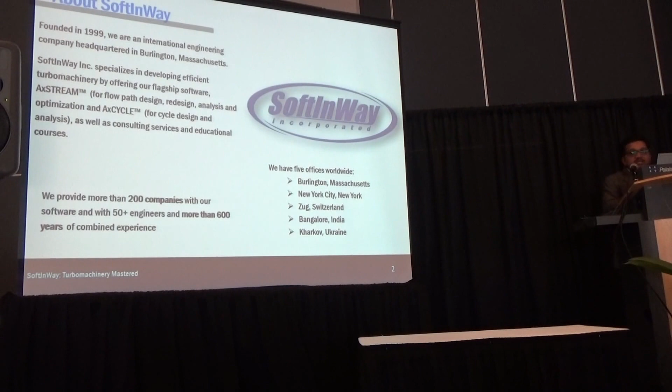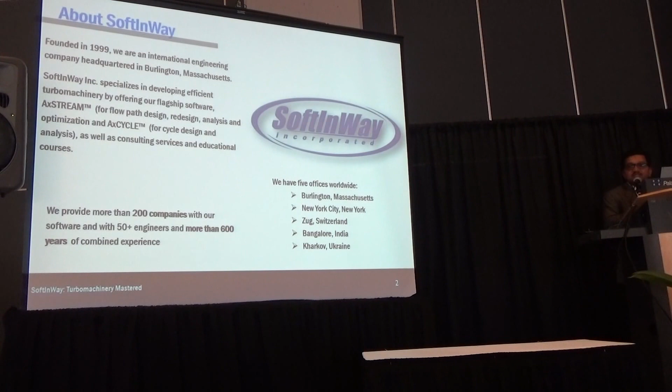Just a brief about Softinway. We are founded in 1999 as a consulting company headquartered in Burlington. We specialized in developing turbomachinery design tools and thermodynamic cycle design tools. We have two products, AxStream and AxCycle. Apart from this, we also do consulting services for design of turbomachinery components. We provide more than 200 companies with our software, with 50 plus engineers and more than 600 years of combined turbomachinery experience. We have grown to 5 offices now, headquartered in Burlington, an office in New York, one office in Bangalore in India, an office in Zug, and in Ukraine.

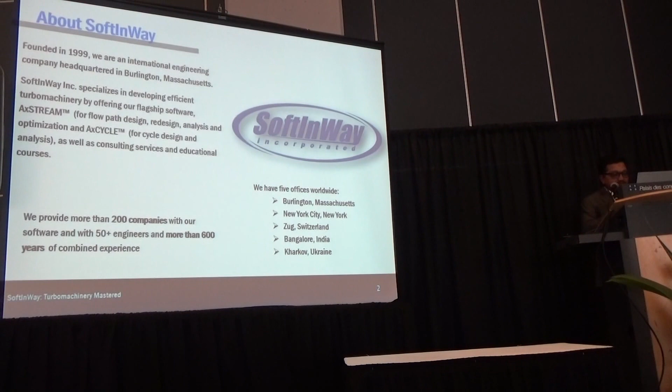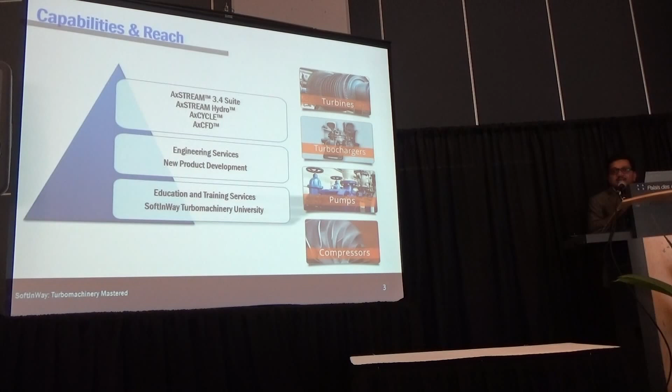We have extensive capabilities and reach. We cover educational services, offering online trainings and classroom-based trainings. We also have our Softinway Turbomachinery University.

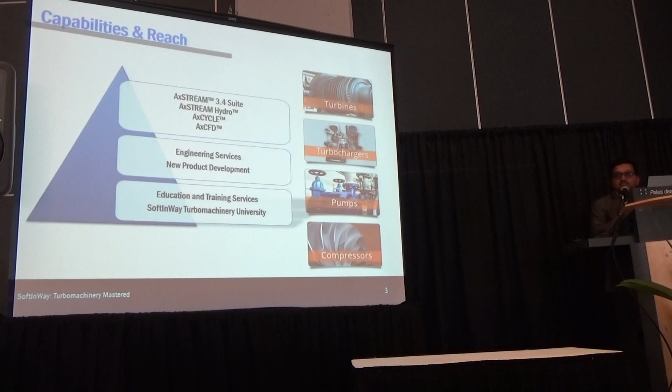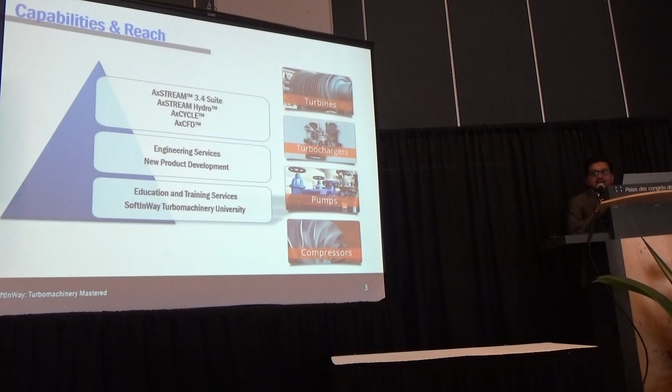Engineering services is our next major part of business. We do everything from full product development to any bits and pieces of the activity that any OEM requires. We have 4 major products: AxStream 3.4, for design of turbomachinery with compressible fluids; AxStream Hydro, for design of pumps and hydraulic machinery; AxCycle, for thermodynamic cycle simulation; and AxCFD, for standalone CFD analysis.

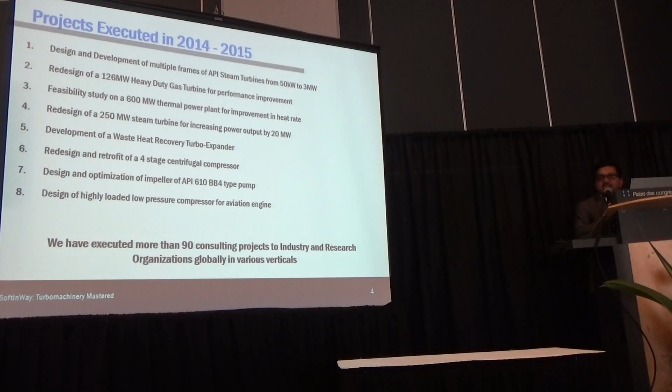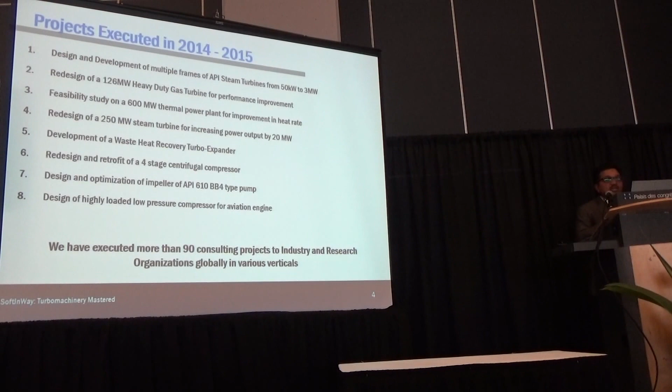These are some of the projects executed in the last year, 2014-2015. We have done design and development of multiple frames of API compliant steam turbines from 50 kilowatt to 3 megawatt, and redesign of a 126 megawatt heavy duty gas turbine for performance improvement.

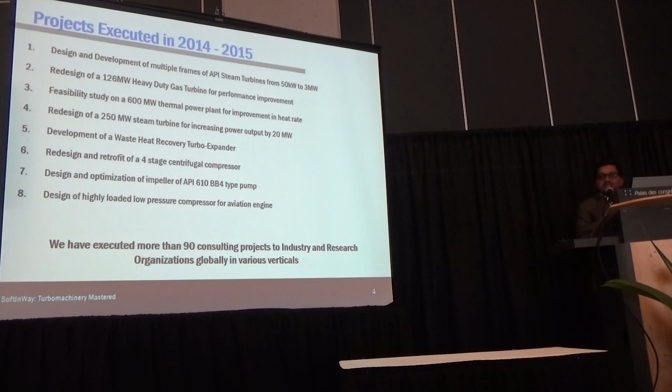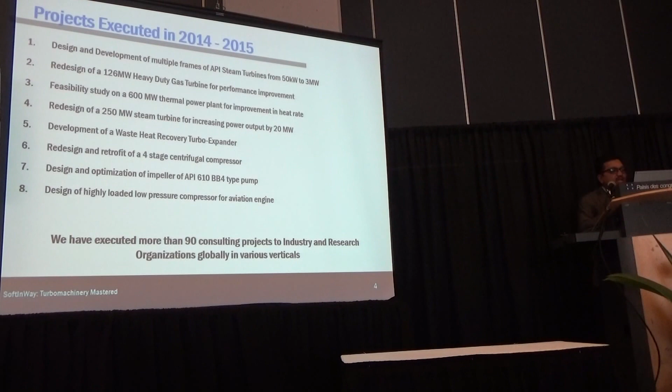This is one of the other projects we did: a feasibility study on a 600 megawatt thermal power plant for improving the heat rate, looking at what possibilities existed for improving heat rates. Also, redesign of a 250 megawatt steam turbine for increasing the power by about 20 megawatt, around 10% increase in capacity, and development of a waste heat recovery turbo expander for an automotive application.

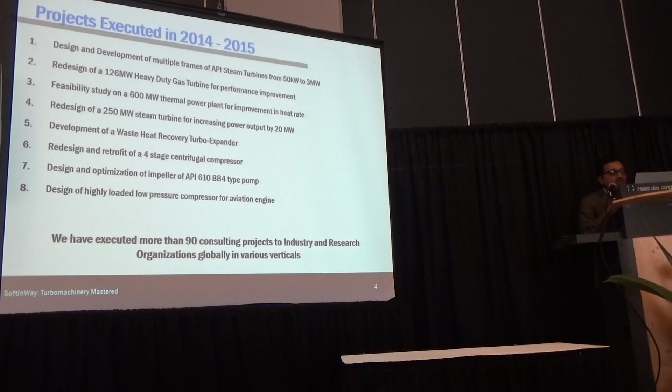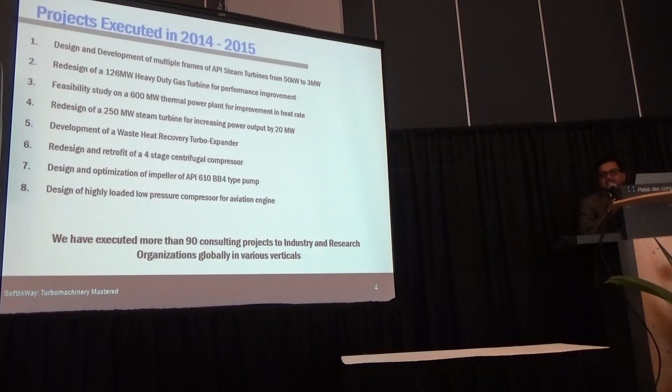Redesign and retrofit of a 4-stage centrifugal compressor; design and optimization of an impeller for an API 610 BB4 type pump; and design of a highly loaded low pressure compressor for an aviation engine, a 3-stage compressor. Since inception, we have executed more than 90 projects across different verticals.

Leveraging our expertise from one domain to the other, that's what I'm going to talk about today. One example I'll show is going from aerospace to home appliances.

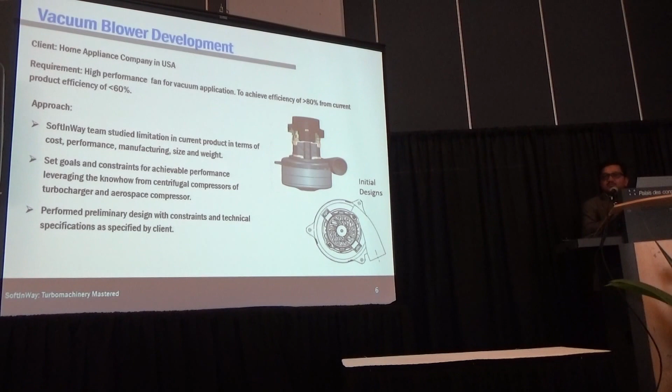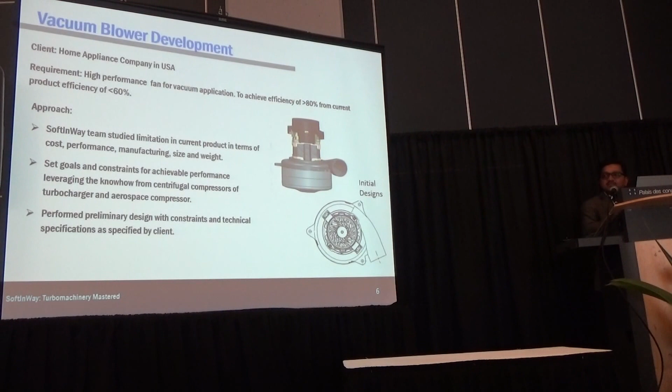A home appliances company in the USA wanted us to help improve their efficiencies to a much higher level. Currently in gas turbines or aviation, compressor efficiencies are more than 80%, while in home appliances efficiency is around 60%. So their objective was how to go about improving these efficiencies to those levels.

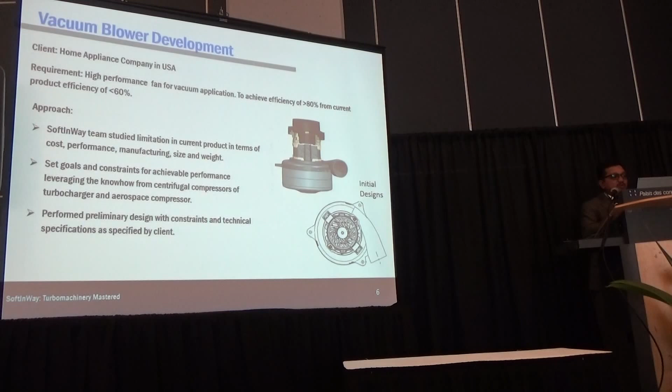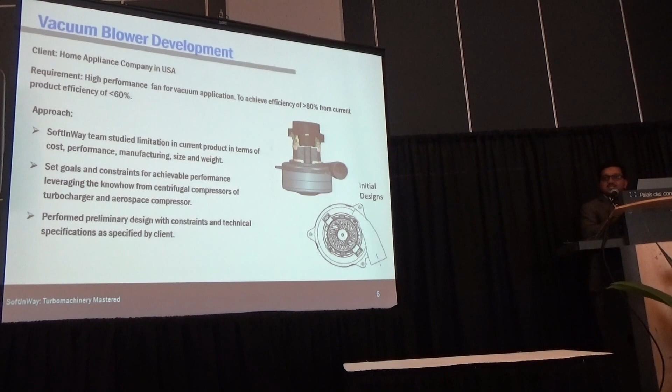Our approach was to study the limitations in their current product in terms of cost, performance, manufacturing, size, and weight. Based on this, we were able to set the goals and constraints for achieving the performance, leveraging our know-how on centrifugal compressors for turbochargers and aerospace compressors. We performed the preliminary design with different constraints and technical specifications as given by our client.

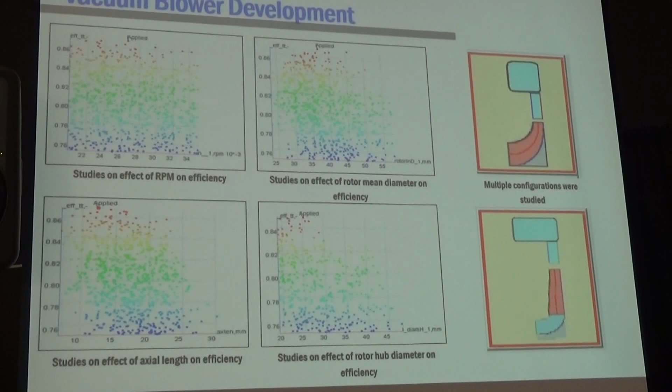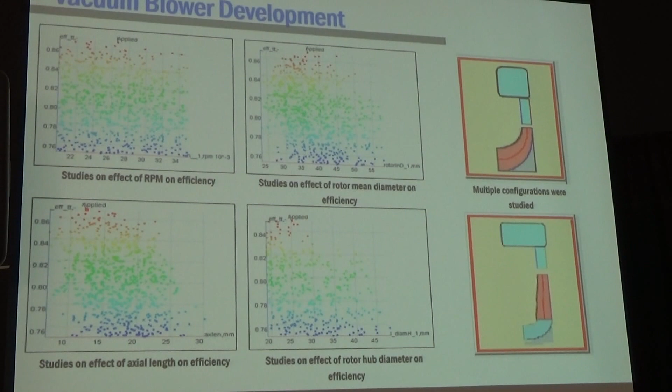As you see here, we studied the optimal RPM for their particular application, looking at a range of speeds from 20,000 to 36,000 RPM, and selected the best achievable speed for this compressor. We then studied the rotor mean diameter in terms of efficiency, looking at the optimal diameters for achieving efficiency, then axial length and rotor hub diameter. These were some of the sample parameters studied.

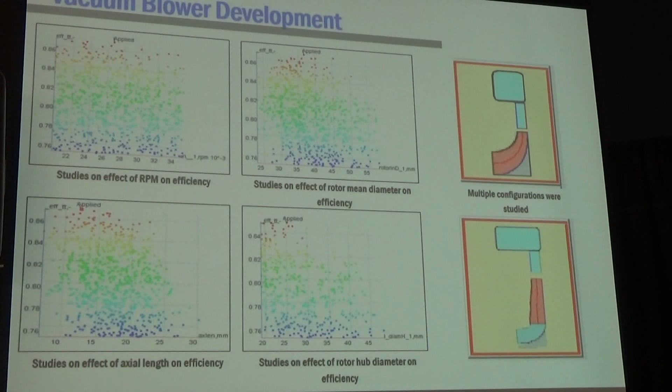Different configurations for the compressor were studied to see which could meet the requirements and give the best efficiencies. We studied multiple configurations of the impeller and optimized them to meet both dimensional constraints and performance objectives. Finally, the blower we designed for them was about 16% more efficient than their existing product line, meeting the design constraints and performance requirements with minimal changes to their manufacturing process.

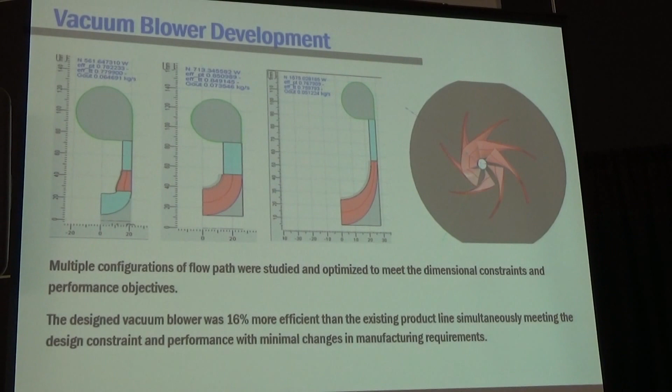So that was the goal, and we were able to achieve that.

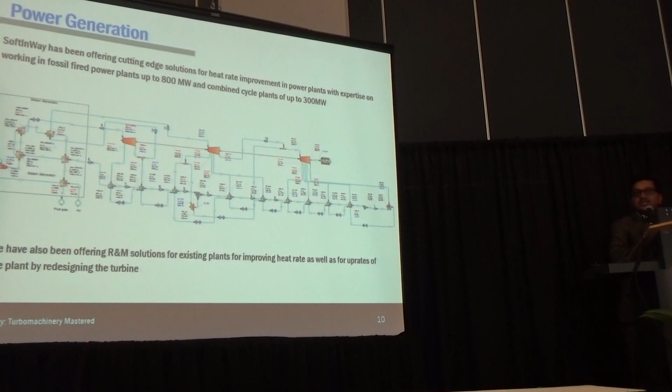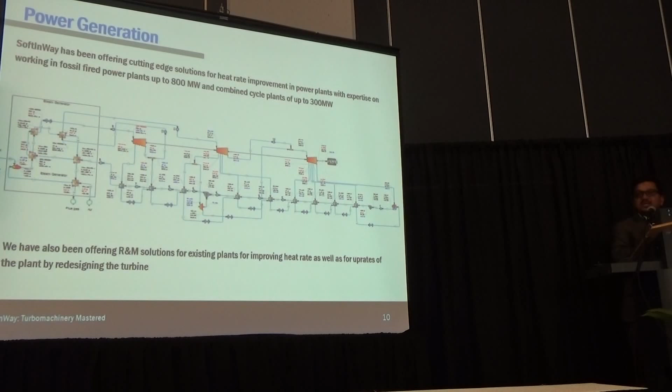The next one is from power generation to automobile. We have been extensively working on power generation industries, offering thermodynamic cycle calculations, looking at how it can be further improved, optimizing existing plants. We had quite experience working on up to 800 megawatt steam turbine or fossil-fired plants and up to 300 megawatt combined cycle plants.

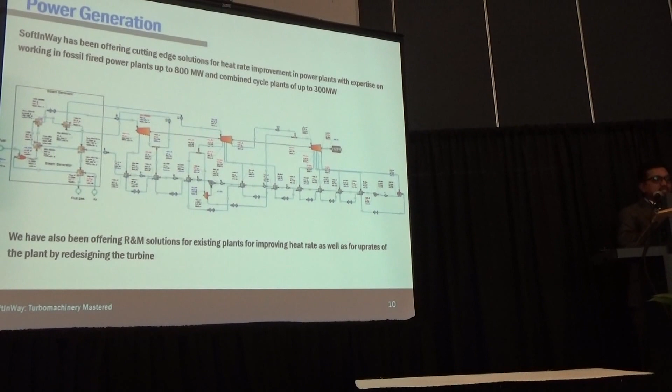Here is one of the pictures of one of the cycles that was simulated. We are also offering solutions in retrofit and modernization of existing plants, and also uprating some of the existing plants.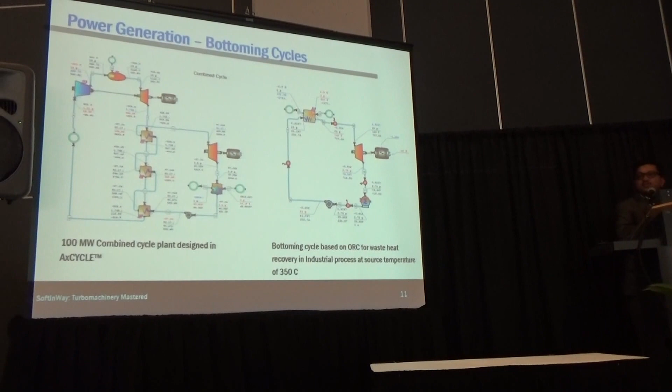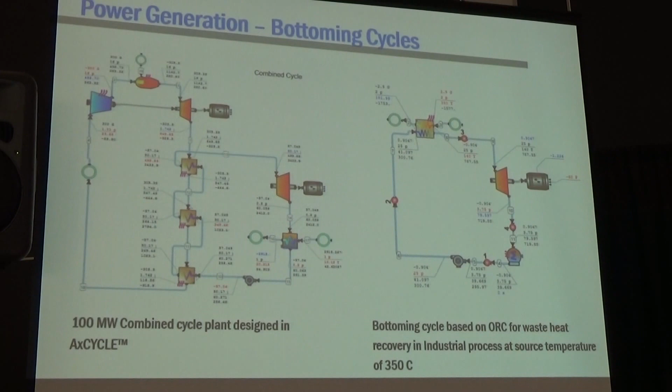To improve performance, one method is to go for a bottoming cycle. In gas turbine, I'm showing some examples where you can see gas turbine with a combined steam cycle, meaning a combined cycle giving better performance. This is for a 100 megawatt combined cycle plant, and we can also have bottoming cycles like ORC cycles for waste heat recovery, which can be used for industrial sources and can even be applied for automotive application.

This is one of the waste heat recovery turbines which we have designed for one of our customers. The entire machine design is shown on the left side, and the manufactured machine during testing is shown on the right side.

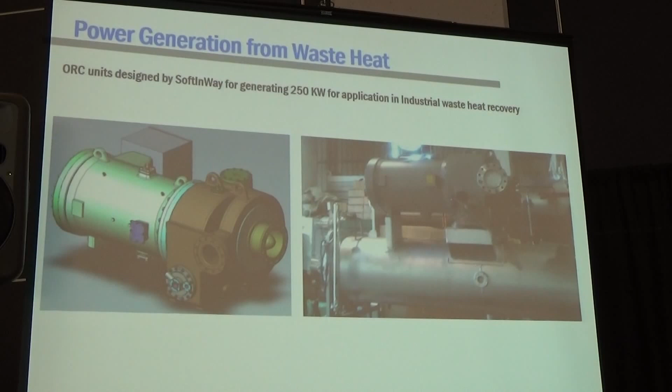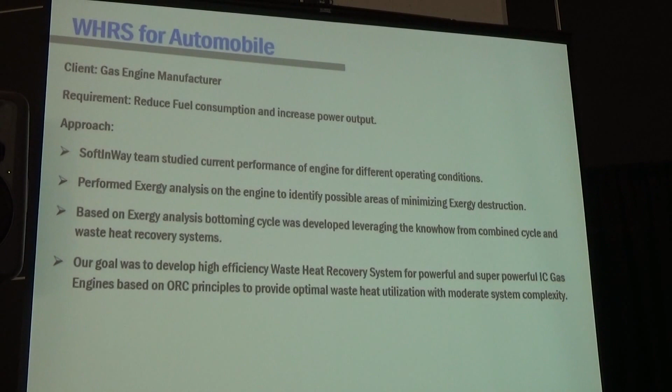Using this experience from working in automobile and power generation industries, an automotive customer approached us to look at how we can help them recover or increase the efficiency of their engine. So we looked at the option of how we can reduce fuel consumption and increase power output. Our objective was to study the current performance of the engine for different operating conditions.

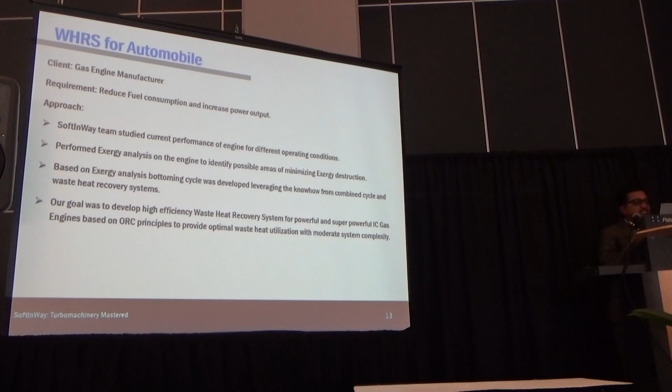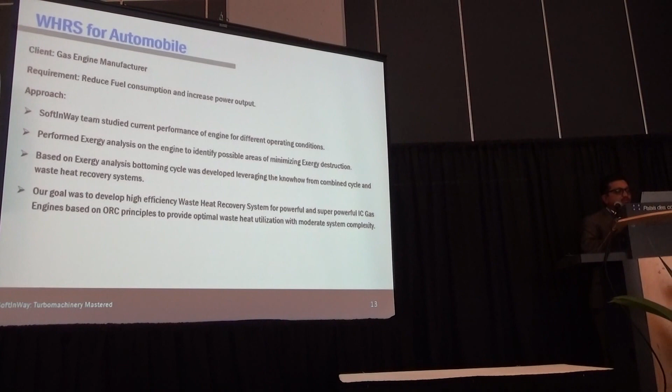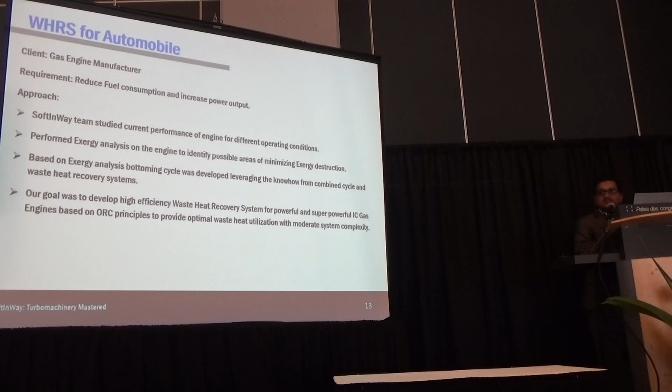We started with that, performed exergy analysis on the engine to identify possible areas for minimizing exergy destruction. Based on this analysis, we developed the bottoming cycle, leveraging our know-how on combined cycle and waste heat recovery systems. Our goal was to develop a high efficiency waste heat recovery system for powerful and super powerful IC gas engines based on ORC principles, to provide optimal waste heat utilization with moderate system complexity.

Because when talking about automobile application, we also need to consider the size and weight. It should not be a penalty on the fuel consumption.

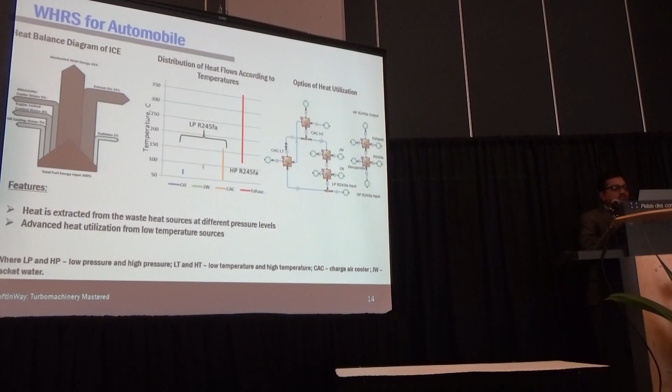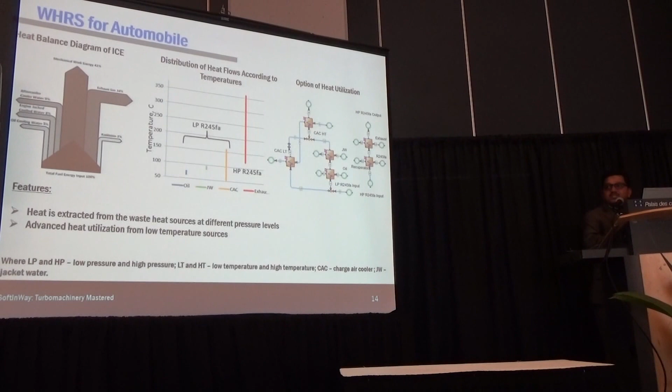You can see the heat balance diagram here. A major part of the heat is lost in terms of exhaust gas and in cooling water jackets, oil cooling, and water cooling. So those are the different areas where heat is being lost. Some of these are low temperature heats and the exhaust is a high temperature heat.

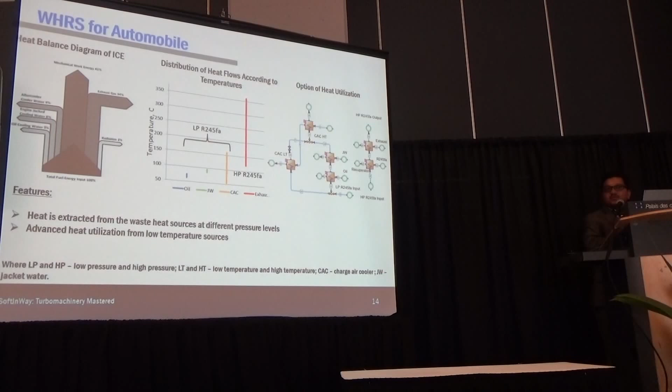So we did different studies and then came out with needing two sets of turbines, one a low pressure turbine and a high pressure turbine, going with fluids in transcritical conditions. That's what we decided to go with for this particular project.

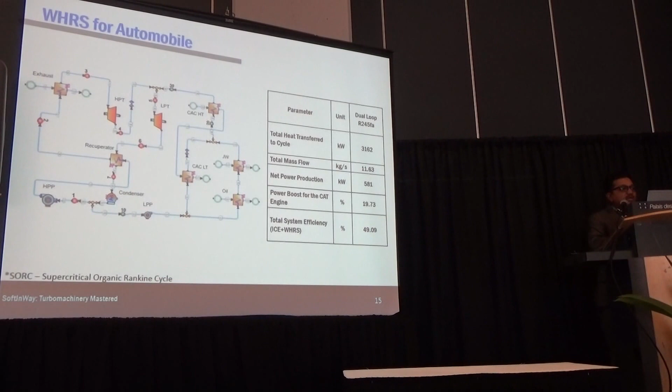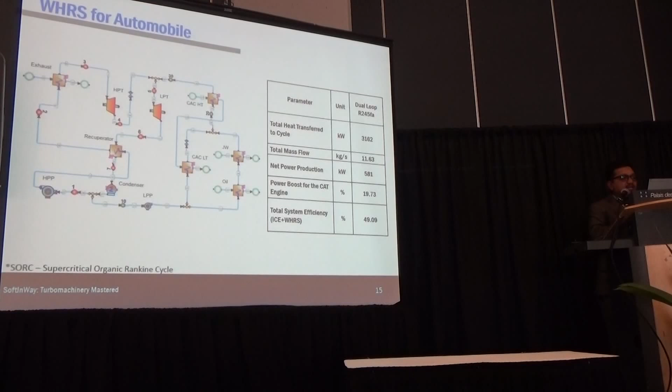Here you can see the complete cycle where we have the recuperator at the exhaust, and recuperators at different locations for extracting heat from the cooling water jackets and from the charge cooler and other locations. The HP turbine and LP turbine is what you see here.

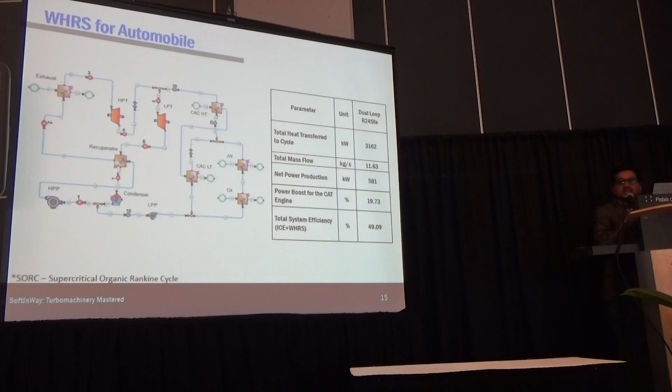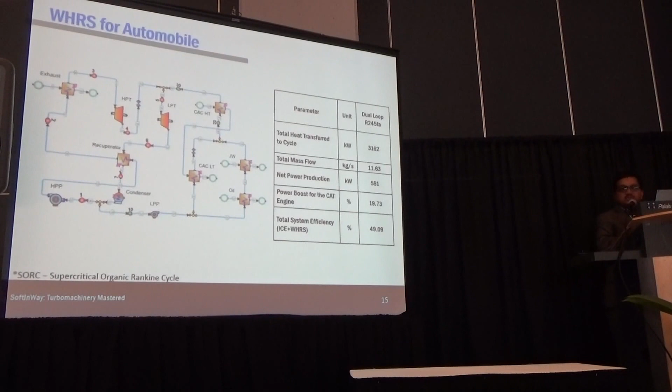The total waste heat available is about 3 megawatts, and the mass flow is about 11.63. We were able to convert that into useful electricity, or power, for about 581 kilowatts, giving a power boost of about 19.73%. So the total efficiency of the system increased to about 49.09%.

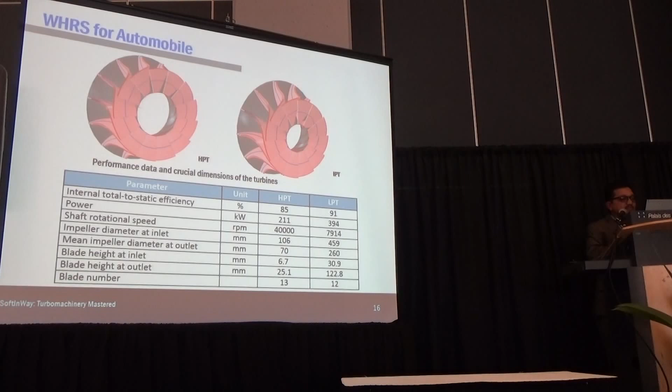This is the HP turbine and the LP turbine which was designed. It's a radial machine because the power output was quite low. The efficiencies we achieved in our initial design were about 85 and 91%. The power produced by the HP turbine is about 211 kilowatts and the LP turbine is about 394 kilowatts.

Similarly, taking technology and leveraging our know-how from aerospace to nuclear turbines.

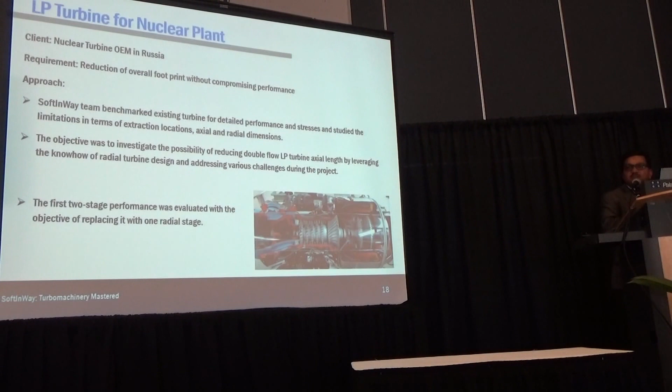One of the nuclear turbine manufacturers in Russia approached us for an R&D project where they wanted to see what are the possible ways to reduce the axial length of the entire turbine, LP turbines.

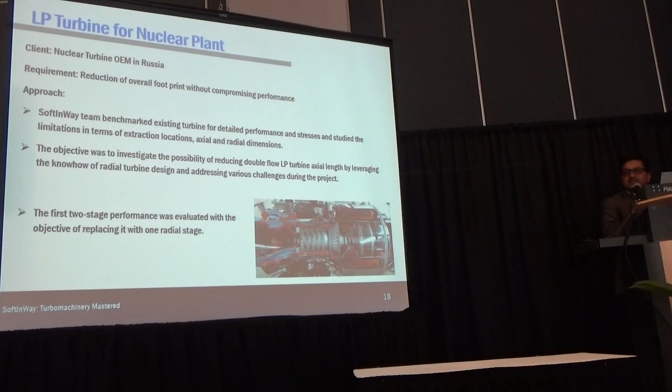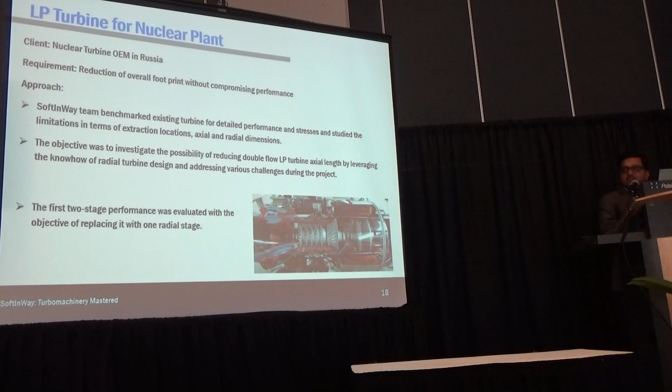To begin with, we benchmarked their existing machine, considering the performance as well as the stresses, and studied the limitations based on extraction locations, radial and axial dimensions. Our objective was to investigate possibilities for reducing the axial length by leveraging our know-how for radial turbine design.

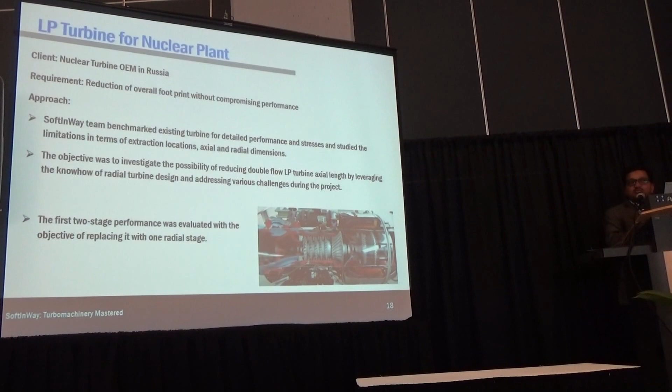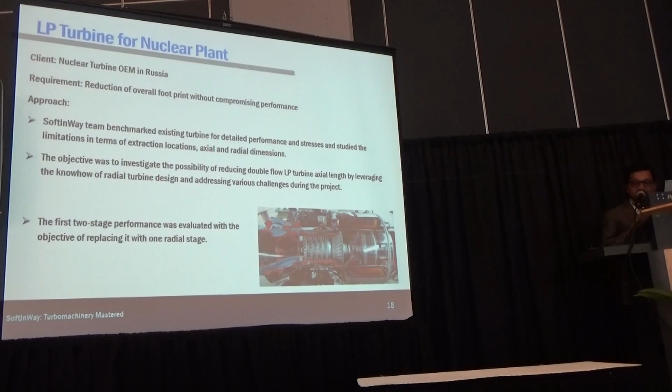We decided the first two stages of the axial turbine can be replaced by a radial stage because we have the larger frontal area due to the last stage blade height, and this could possibly reduce the axial length.

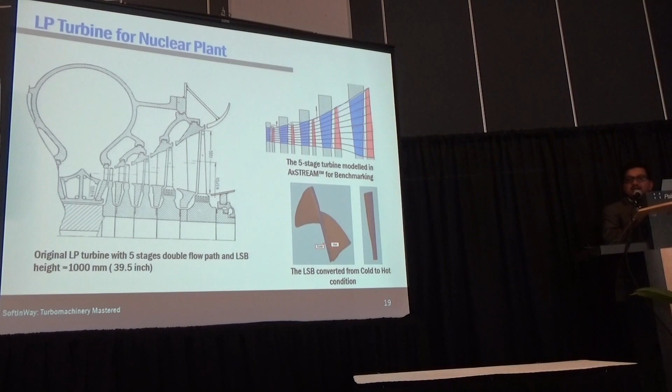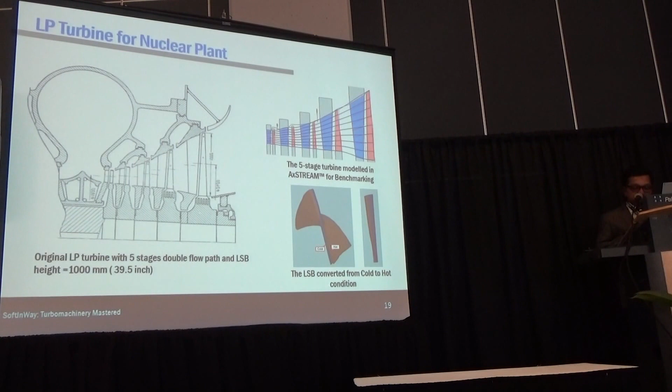Here you can see the original turbine which was modeled in our tool AxSTREAM. Since we have the raw data in cold condition, we converted the geometry from cold to hot conditions and analyzed them. After analyzing, this became our benchmark. Based on this, we replaced the first two axial stages with a radial stage.

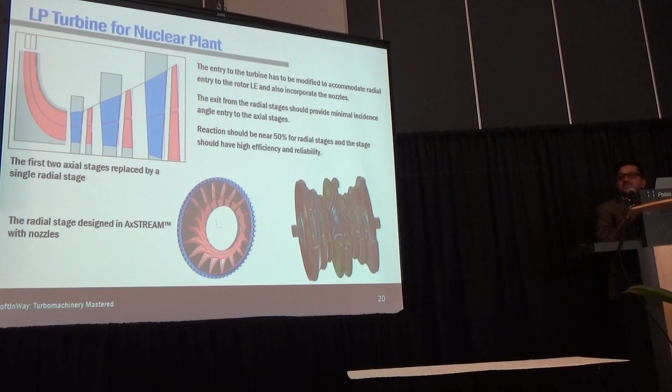The entry to the turbine had to be modified to accommodate the radial turbine with the nozzles. We also had to ensure that the exit from the radial stages should have minimum incidence for the entry to the axial stages, and we wanted reaction to be somewhere around 50% for the radial stages.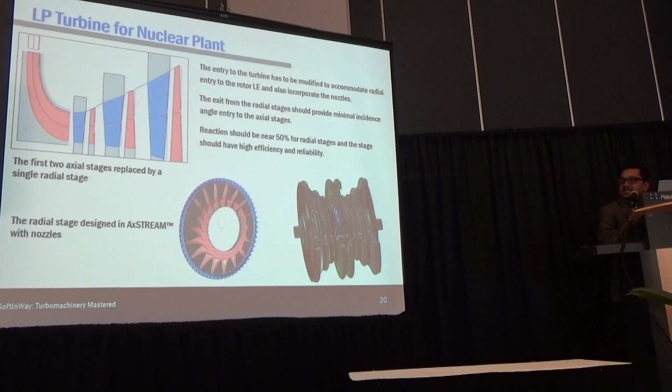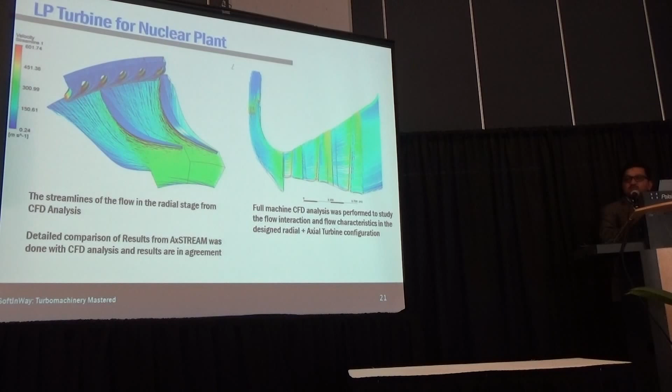This is the radial stage designed in AxSTREAM, and the complete assembled model is what you see here. We did detailed CFD analysis to understand the flow because there is some amount of wetness in the fluid. First we studied only the radial stages, then we studied the complete machine to understand how the flow interaction is from the radial stage to the axial stages.

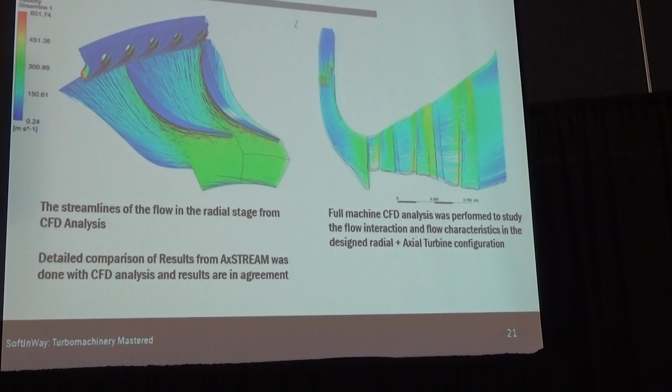The best thing is the results from AxSTREAM very closely match the CFD calculations using both our in-house CFD tools and commercial CFD tools.

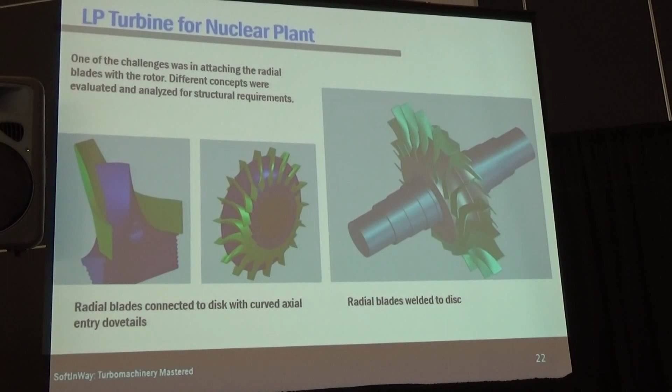The next challenge was how do we go for manufacturing? So whether you need to have it as a welded disc or with an attachment, and what kind of attachment should be done.

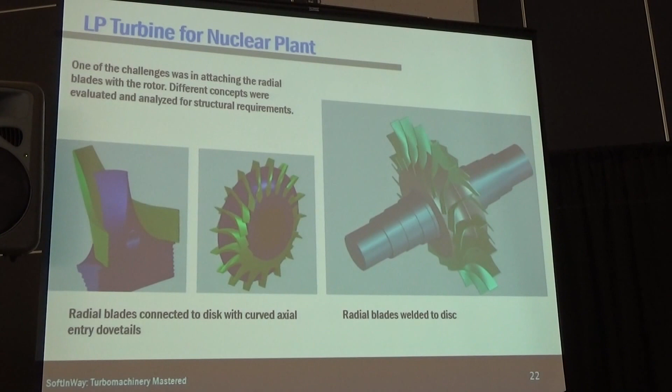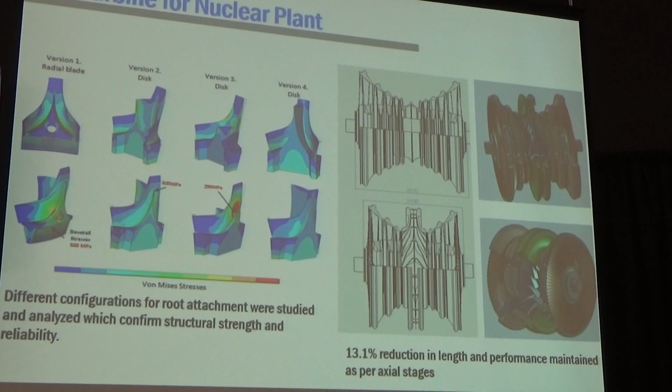We did a couple of studies on this. Different configurations were evaluated. We studied the stresses, looked at if it is welded what kind of stresses come, if it is a curved fir tree what kind of stresses are there, and also different configurations. We finally concluded that the stresses are reasonable with curved fir tree configurations, and it also gives flexibility if there are any failures or you want to replace the bladings.

At the end of this, we were able to reduce the axial length by about 13%, maintaining the same performance. There was not much difference in the performance.

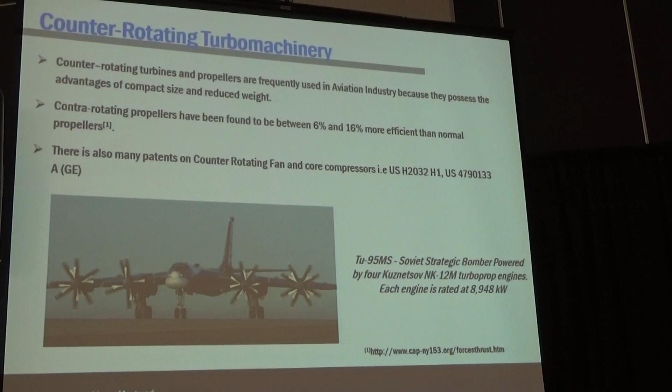Similarly, we worked on counter-rotating turbomachinery. Normally counter-rotating turbomachinery is common in propellers and for gas turbines.

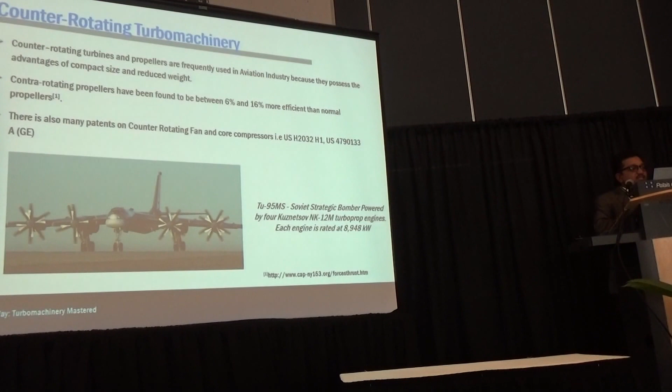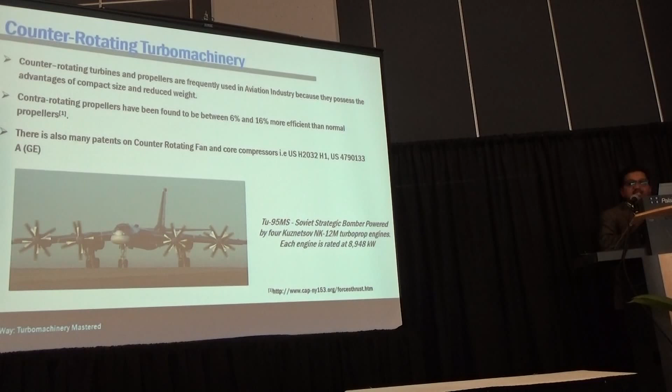What we see is counter-rotating propellers have quite good efficiencies, varying between 6 to 16% compared to normal propellers, based on a reference shown at the bottom. There are also many patents on counter-rotating fans and core compressors, so that's where we thought maybe we need to try this for this particular project.

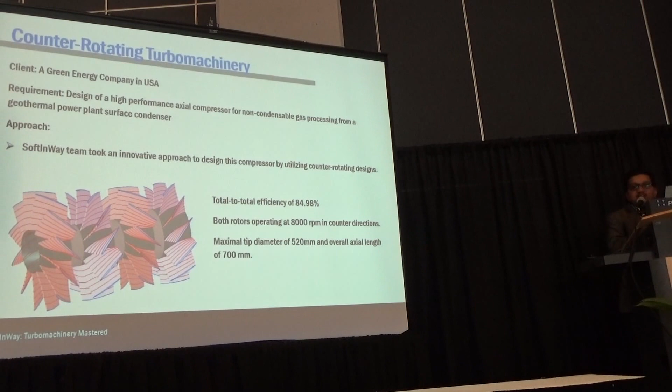The requirement was from a green energy company based in the US. They wanted us to develop a high performance axial compressor for non-condensable gas processing from a geothermal power plant surface condenser. So our approach was to go with a counter-rotating compressor for this particular application.

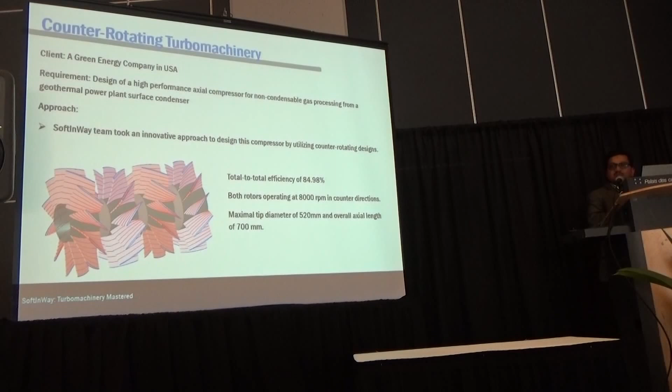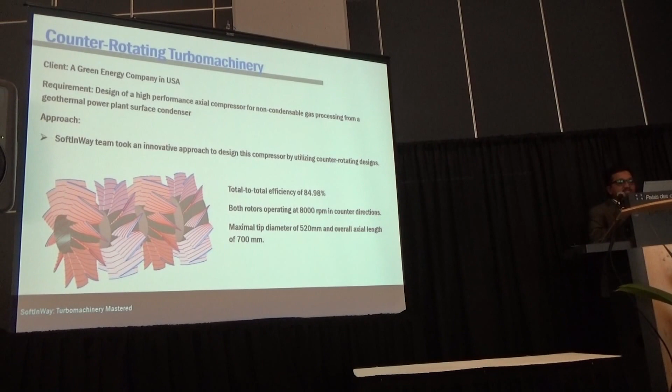We designed a counter-rotating compressor, both rotors operating at the same speed in counter directions. We were able to achieve an efficiency of about 84.98% with dimensional constraints of tip diameter of 520 mm and axial length of about 700 millimeters.

So that's the brief about the presentation. Any questions?

Got any projects going in combined cycle that have come in since the presentation? Do you have any new projects in combined cycle, sir? Yes, hopefully you got many at the show. Is there any you'd like to share that weren't mentioned?